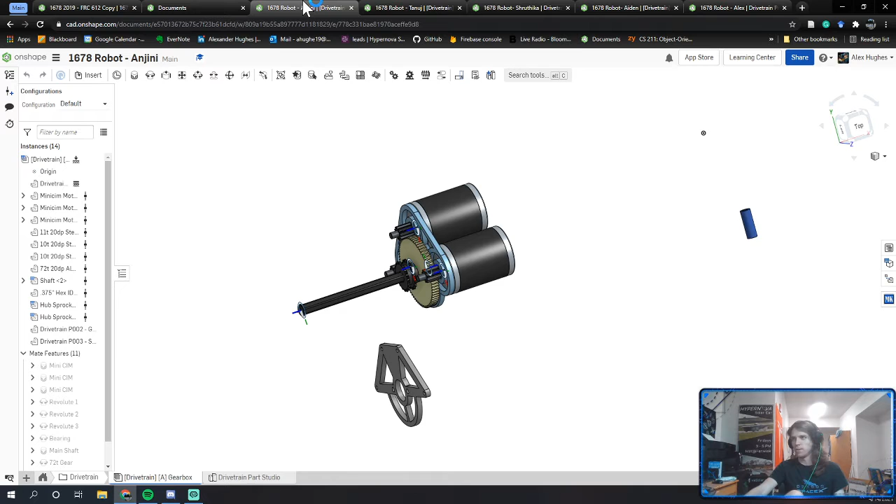Tanuj built his gearbox backwards. Anjini built their gearbox sideways for no particular reason other than to annoy me.

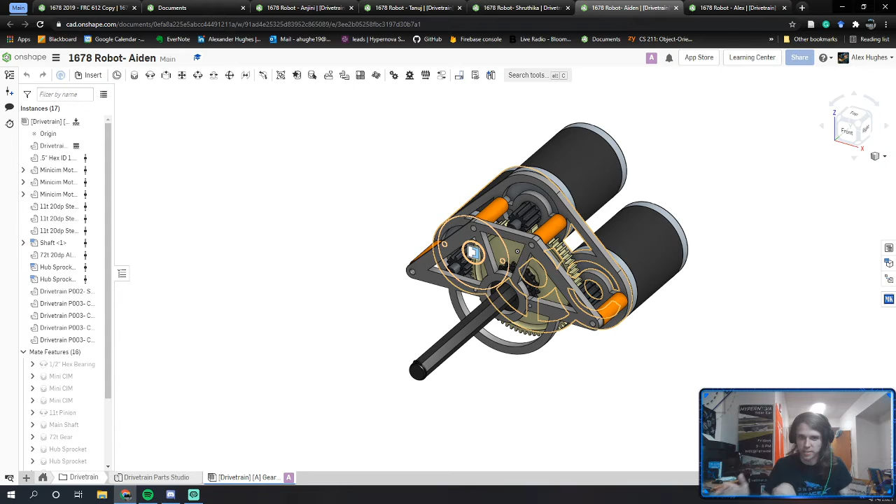Try and throw this water bottle into my recycle bin. Missed.

Greetings, Aiden and Tanuj. How are you both doing today? Good, how are you? Doing pretty good. Got my second COVID shot today, so I'm seeing if I get any side effects. Haven't felt any yet, but we'll see.

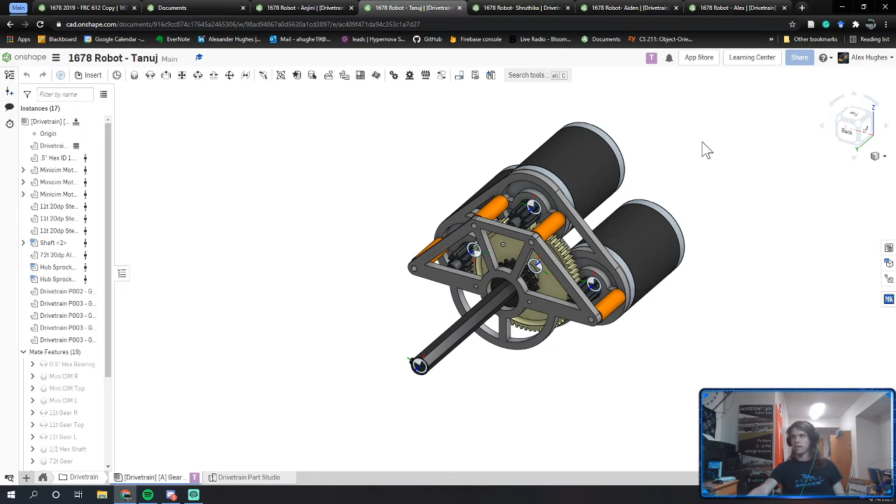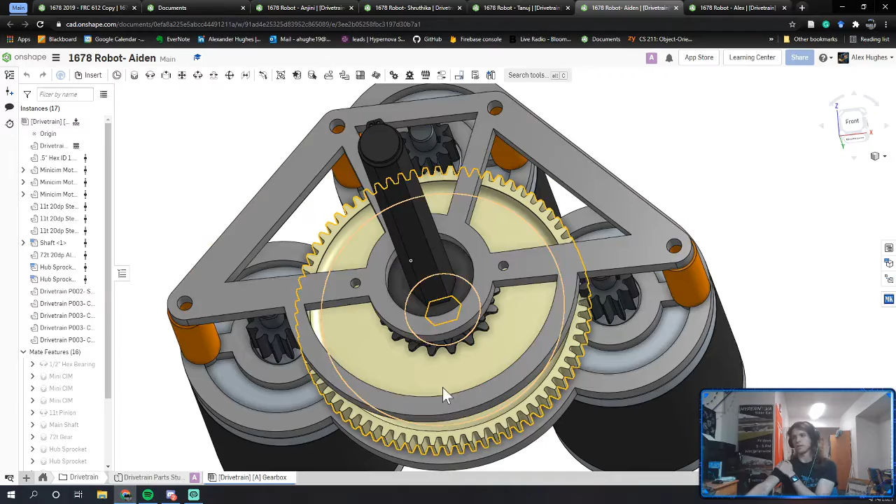I'm just kind of going between these three views. I can't notice anything major. The only change I would make, Aiden, is here: you don't have this lower bar connecting this lower guardrail, while this one I have right here I would probably model, just because realistically thinking about CNCing this bar, that's a lot of distance without any sort of support to the main structure. That's going to be less flexible, less likely to be clean when it comes out of the CNC. It's just overall not great to have that much area unsupported. So nothing major, just something I noticed.

Tanuj, if you ever get annoyed by these mate icons, press K on your keyboard and that turns them on and off. Or press J, same thing happens with both of them. So K and J turn those off. I just like keeping them off because they annoy me.

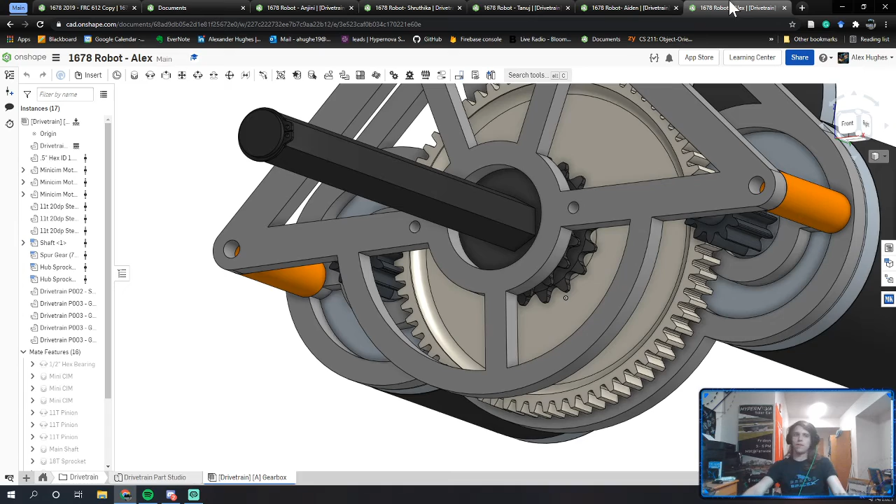Okay, well I guess we will go ahead and get started. First, do either of you have questions from where we left off two weeks ago?

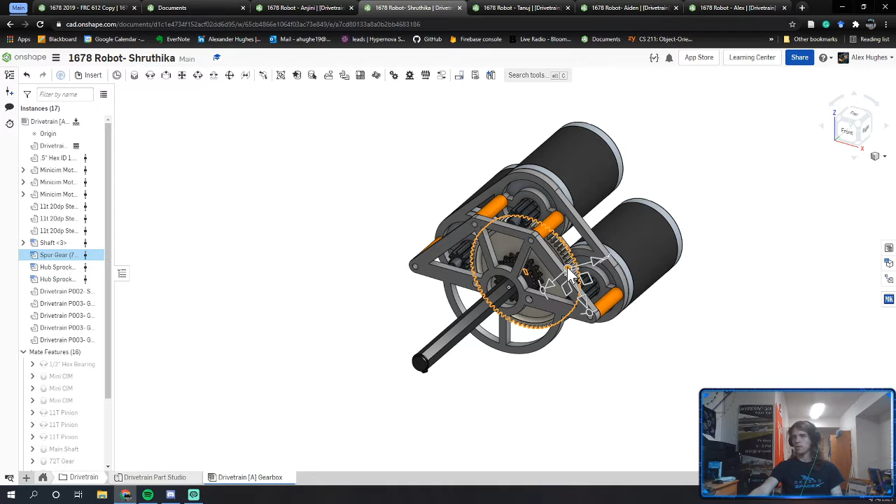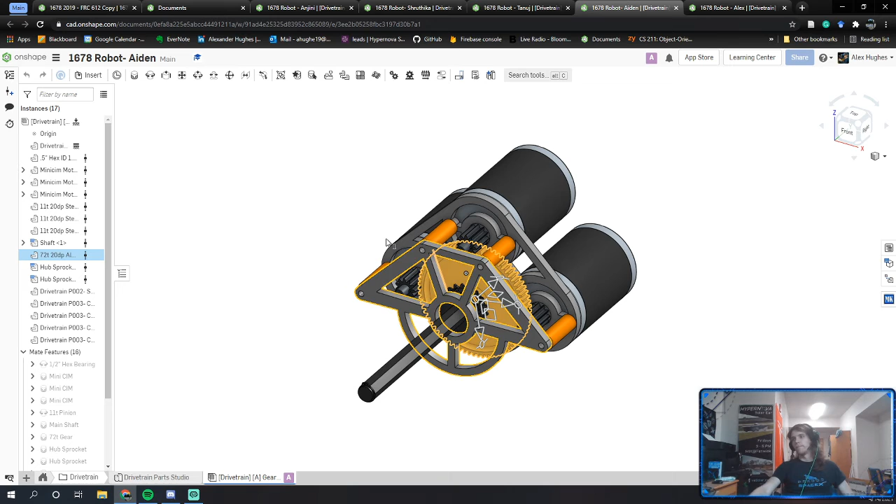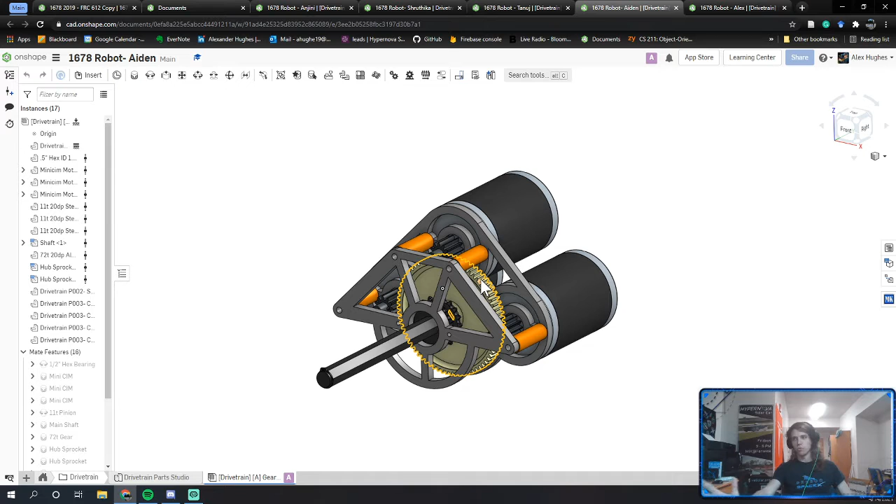Okay, so I assume none of you have questions, feel free to speak up if you do. One other thing I noticed quickly from both you, Tanuj and Aiden, you used the 72 tooth pocketed aluminum gear, while I used the 72 tooth steel gear. Doesn't matter, the CAD models are identical, but if we were actually CADing a robot we were building, we'd want to use the component we'd actually design into the robot. As I mentioned last week, I prefer using all steel gears because steel gears don't wear down as much as aluminum gears. So if you're going to use steel gears in your robot, you might as well put steel gears in your CAD model, because worst comes to worst, someone pulls the bill of materials and says we need to buy an aluminum gear, when really we needed a steel gear. So that might be one minor thing to change. Otherwise, everything looks great, all of y'all's gearboxes look basically identical other than minor things.

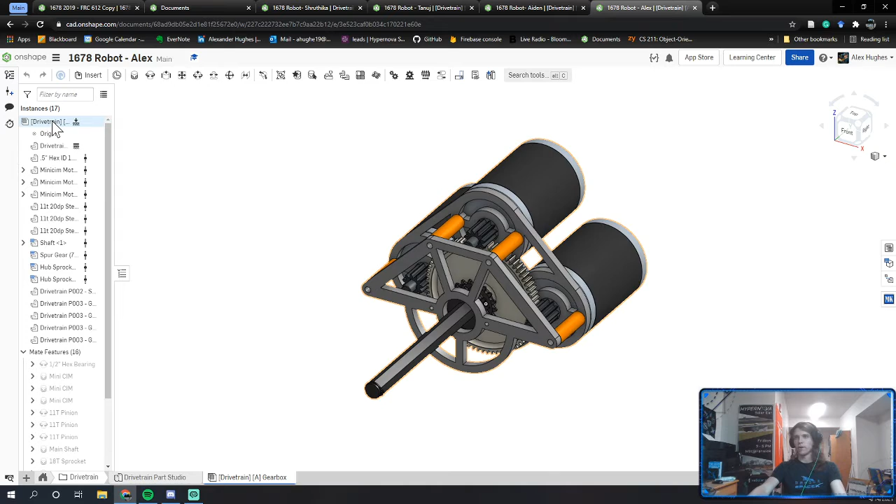I recommend quickly doing an interference check just to see if there's any major issues with your gearboxes.

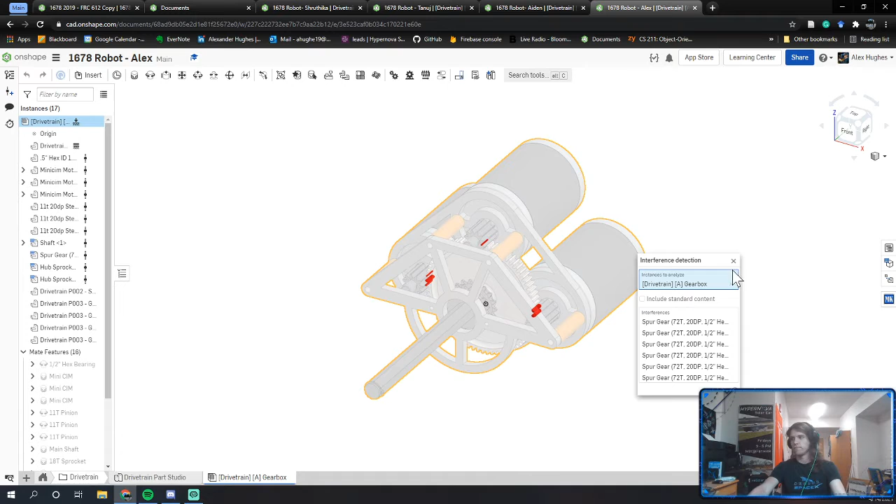Oh Shruthika, hi, sorry, where are we? We're just getting started, so we're in the Onshape documents. I was just looking at all of y'all's documents. Just open up your own document and follow along here. So again, let's quickly run an interference check. The way you do that is go to your assembly, click on the upper most instance on the left side instance panel to highlight everything, right click on it and hit check interference.

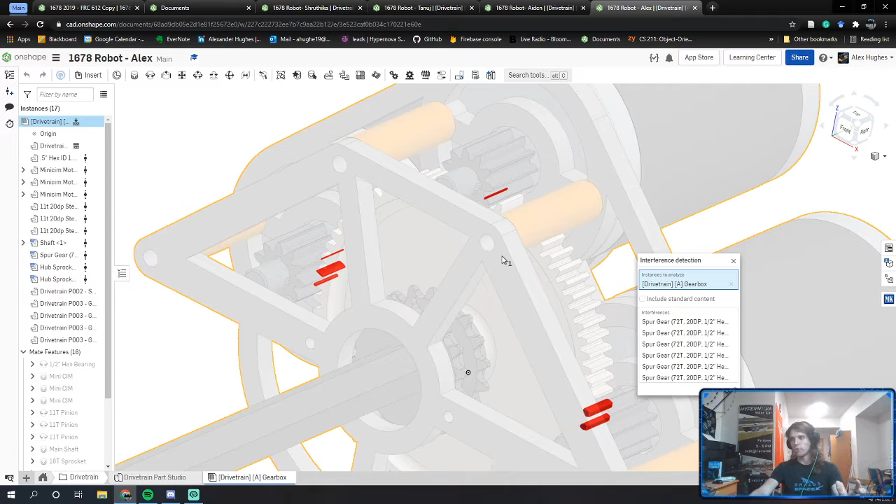Just look around to see if there's any major interferences. Interferences are shown in red here. You're always going to have some interferences. That's kind of unavoidable, but you have to think, is this an interference that matters?

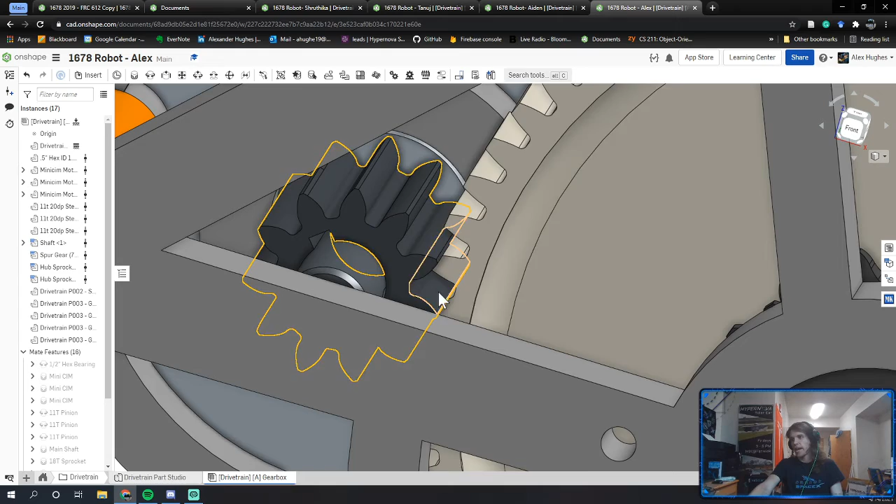In this case, I'm getting some interference between my big spur gear and my little pinion gears. But I know that doesn't matter because I didn't really model in the teeth, as you can see I could twist these gears. I know they mesh perfectly, but I didn't bother actually CADing that since it's a pain if you want the teeth to mesh. I should probably double check the center distance of those, but that's just the thing where you'll always see interferences.

Tanuj, is there a steel 72 tooth pocketed gear in MKCAD? Because I can't find one.

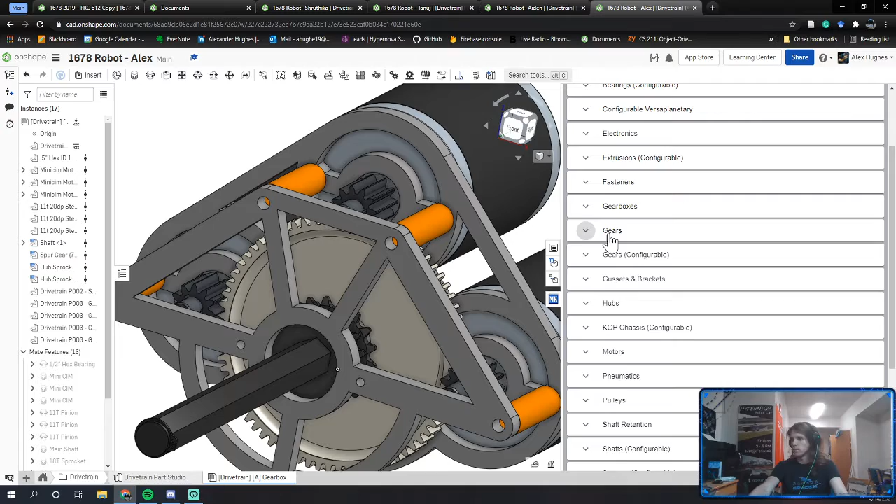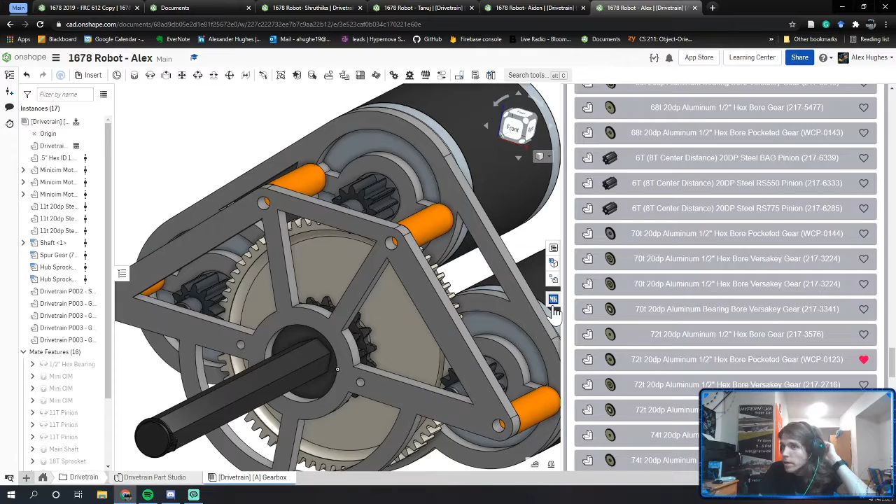There should be, let me check MKCAD quickly. Gears. Gears 70. Huh, that's weird, I do not actually see one in MKCAD either. Where did I pull this from? I might have accidentally pulled this from a different source.

Oh wait, let's check one thing quickly. They might not actually have steel gears that size. Let us check gears on West Coast Products. Pocketed gears, I guess. Aluminum, steel. Okay, I lied, there are no steel 72 tooth gears, so we have to use aluminum. My bad, ignore what I said earlier.

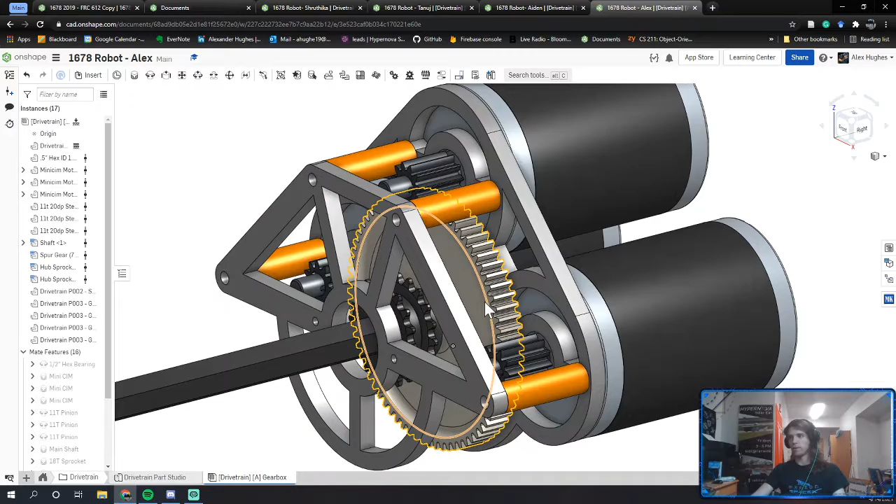I really wish they made larger steel gears, but I guess they don't. You don't get as high of teeth loading on larger gear sets, just because larger gears tend to have less torque on them. So I guess they don't feel the need to make steel gears of that size, but I would do it anyways because they're going to wear down.

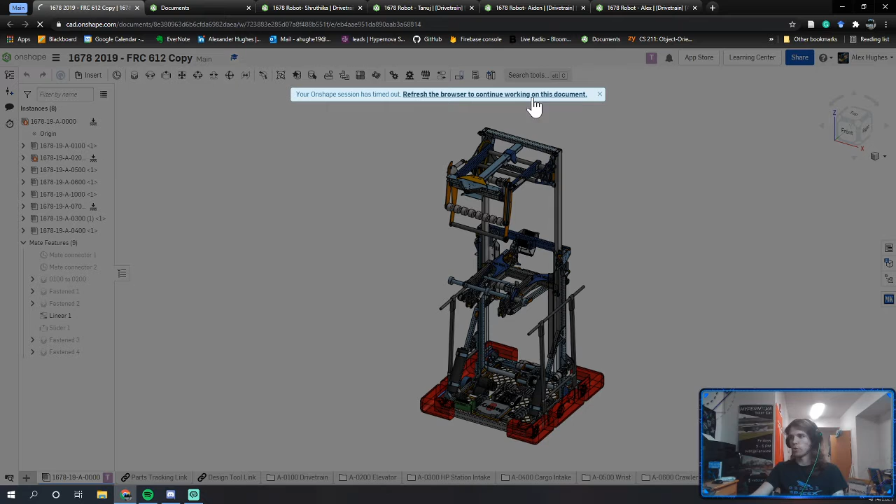Okay, so we got a lot done last time, but let's continue. I really want to get to the point today where we are starting to actually assemble the frame of the drivetrain. If we could get the drivetrain frame done today, I would be very happy. So let's start moving through that.

I am going to put a little block up here in my tabs so I know which tabs I'm working on. Okay, so let us go into the 1678 robot and let's see what we need to do next.

If it's ever going to load. Hopefully my internet didn't crash. I don't think it did, no. My internet might crash today. I've been trying to stream the past few days, just general solar car 3D printer stuff, but my internet keeps crashing, so it makes it very frustrating.

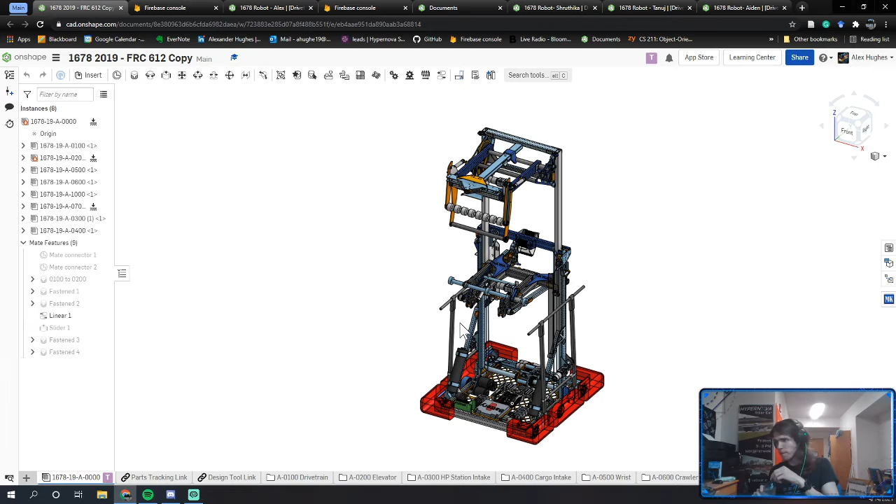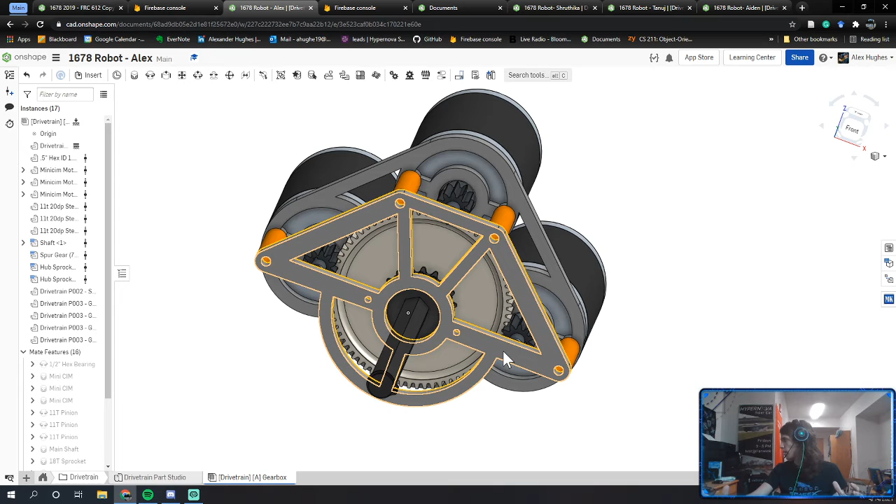So I'm going to go down here, zoom into the drivetrain. Actually let's go to their drivetrain assembly. Okay, cool. So there's a few changes that we need to make to the gearboxes before we continue. First and foremost, the gearboxes we designed aren't actually completely realistic because, I've mentioned this a few weeks back, but we need to add fillets to all the corners.

Shruthika says, I have an interference with my spur gear and I don't know how to fix it. Let me just check here quickly. I'm going to do an interference check. Ah, I see, so this is actually a good example. You have this big interference here in the middle, and this is the type of interference you want to worry about.

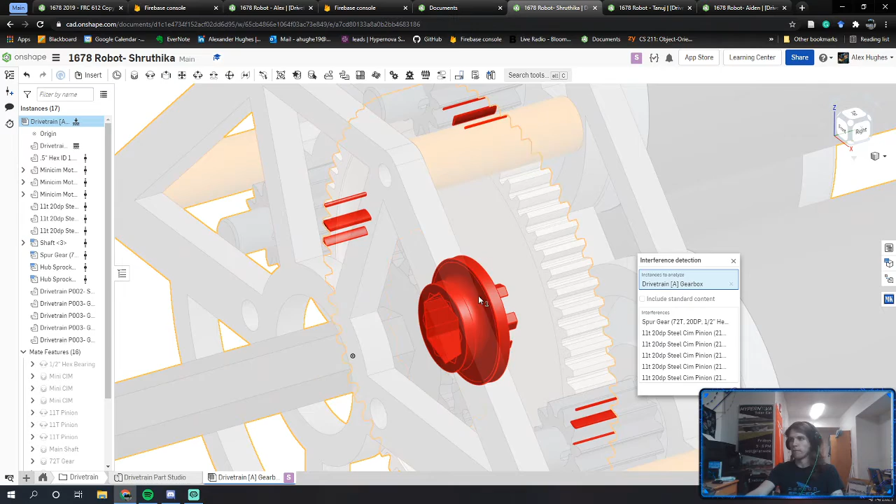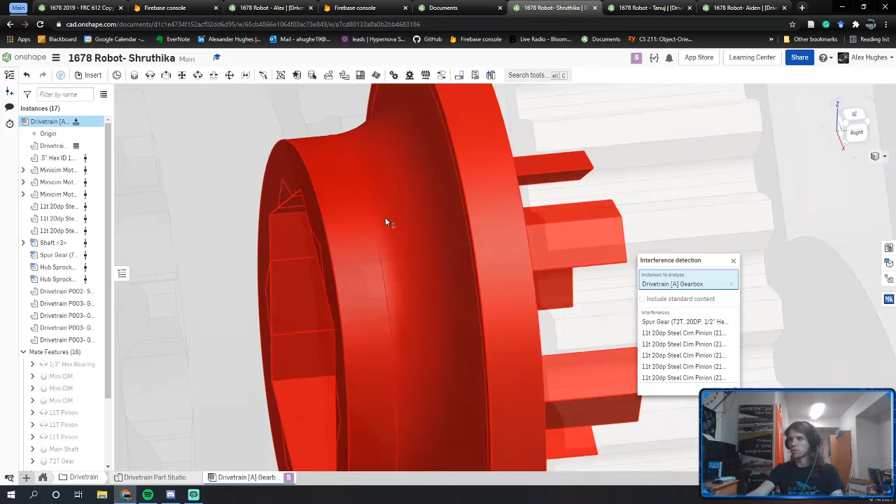So it looks like to me you're having some issues with your hex shaft being tilted at a 90 degree angle, or not even a 90 degree angle, at like a, what is it, 30 degree angle. So that's causing these little pyramids. But then it also looks like you're having an issue with maybe your bearing. I can't quite see what that is, but that might be your bearing conflicting with the rest of your gearbox.

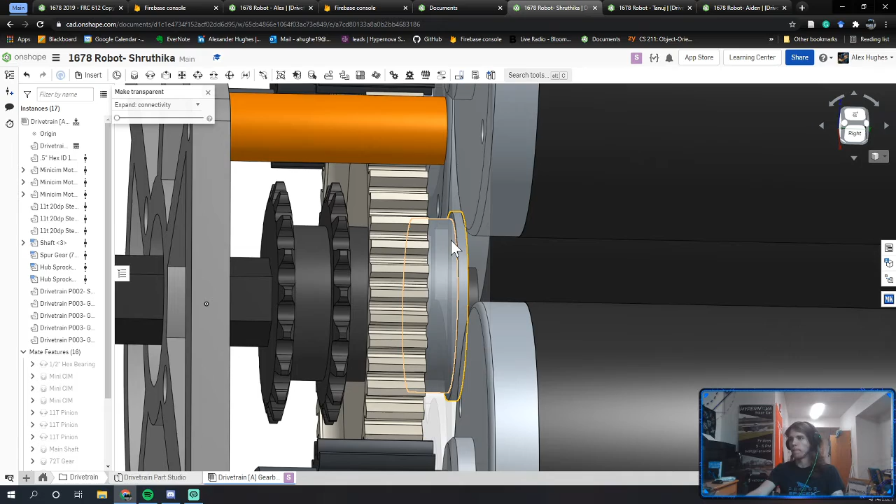Let's actually get in here and see. One easy way to check this is if you right click on a part and make it transparent, you could get in and see what the actual issue might be. So I see that the bearing is going in here, and I'm thinking that possibly the bearing diameter might be larger than the hole that you're putting it into.

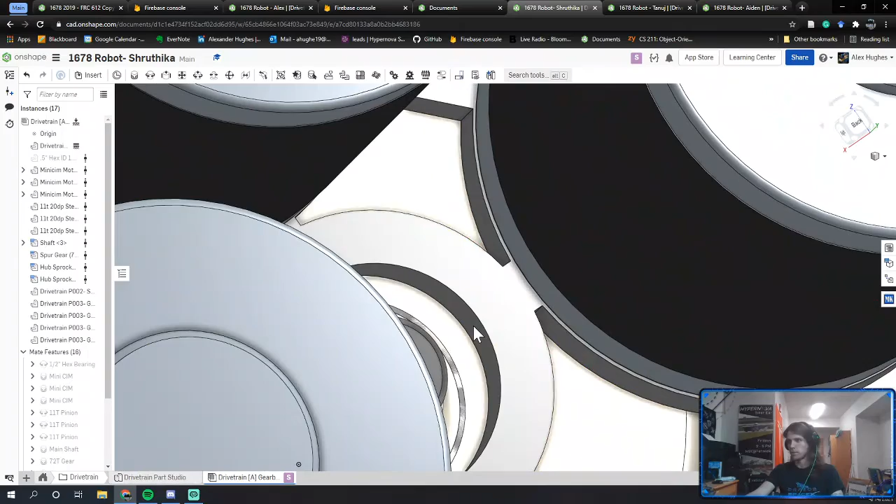I'm going to click on the outside of this bearing, and that has a diameter of 1.124 inches, just under an inch and an eighth. Now let us hide the bearing quickly, and let us grab the outer diameter of this hole. The hole itself also seems to be 1.124 inches, so that doesn't seem to be the issue.

Now that I'm hiding that piece, let's run another interference check. So it doesn't seem to be the bearing - the bearing's too far back. It's something here in the middle.

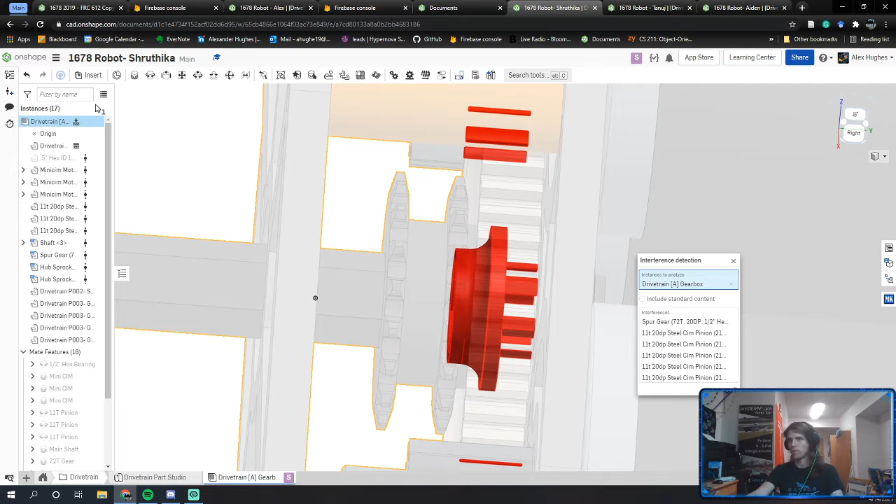So let's hide your sprockets quickly. Ah, I see what the issue is. Your sprocket gear, if I hover over it, you can see the outline of it. The outline of your sprocket is actually going into your gear itself. Notice here, you can see the end of the sprocket is actually going into the gear. So if I hide that...

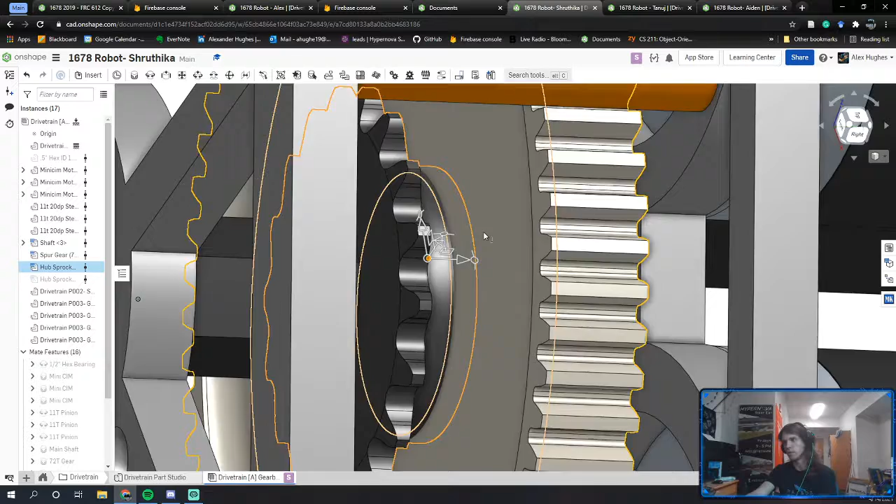That's what the issue was. You were covering up this part of your pocketed gear. So that is a mating issue.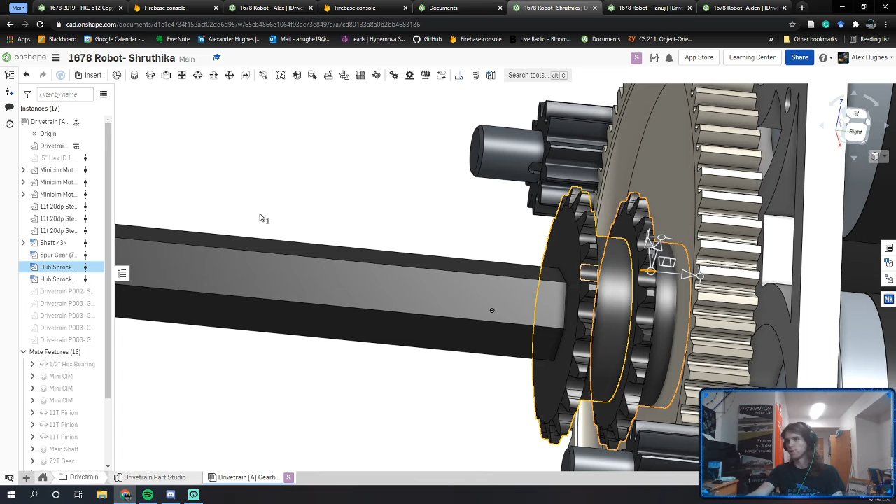So what you need to do is fix the mate for this sprocket gear. An easy way to do that is if you find the part that is your issue, right click on it and hit show mates. It will unhide the mate down here in your mate features, and you could find which of the two might be the issue. I'm assuming it's going to be this first one. You just have to make sure your mate connectors are correct.

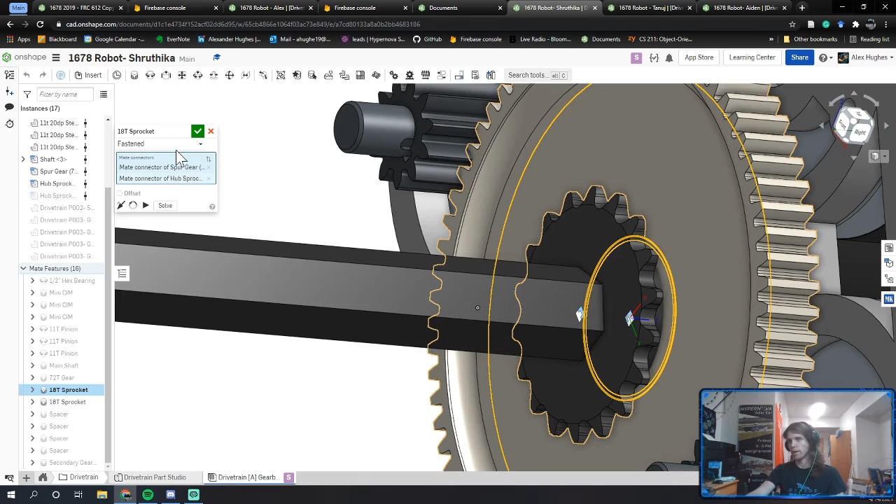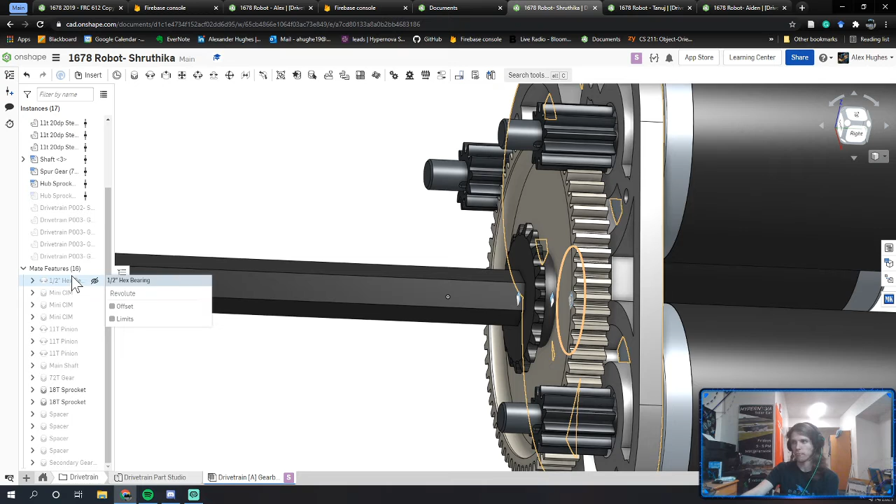That's a pretty easy fix, and that's part of the great thing about having your mate features named - you can easily go in here and find out what the issue is going to be. If you just had Fasten 1, Fasten 2, Fasten 3, Revolute 1, Revolute 2, Revolute 3, it sometimes gets very confusing. Most of the time I don't even need to show the mate features - you could just go down into the mate features and find out which one's the issue.

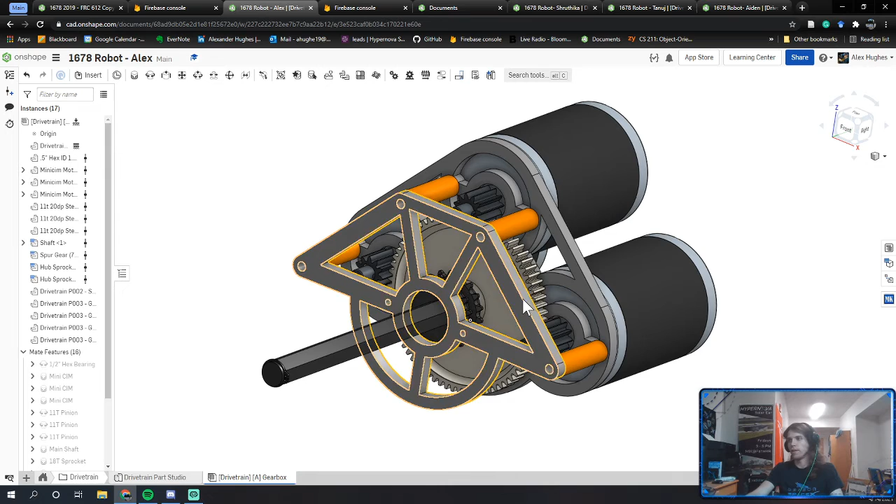Okay, so I'm going to let you fix that, and in the meantime we're going to continue working on some of these parts. I'm going to go back to the drivetrain part studio and pull up drivetrain part 001, the main gearbox plate, the one with all the Pokeball looking things.

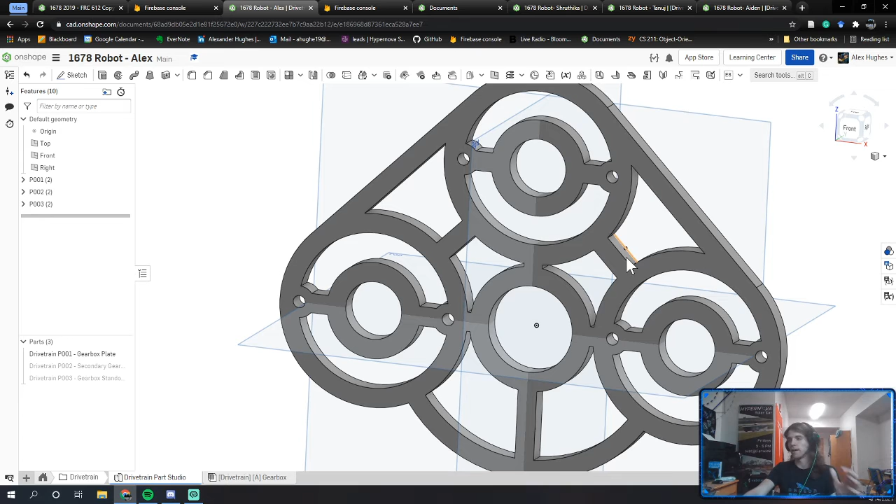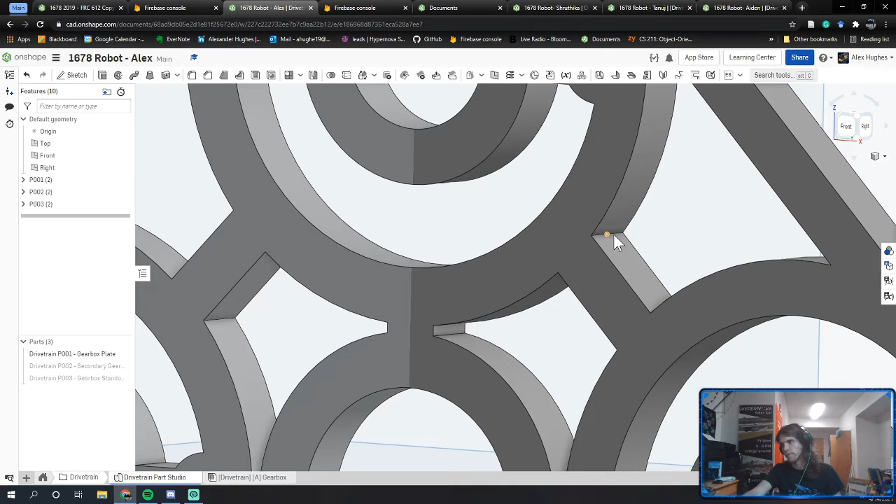As I said in previous weeks, if you're going to CNC this out, when you actually go through the process of CNCing stuff - God, that's hard to say - you can't create perfect corners. If you think about taking a round bit and shoveling out material using a circular bit, you're going to create a circular path. So anywhere you have a sharp corner, like here, that's just not realistic. You can't do that unless you had a really, really tiny bit. That's the only case in which you could make a sharper corner, but even then it's still going to be rounded slightly.

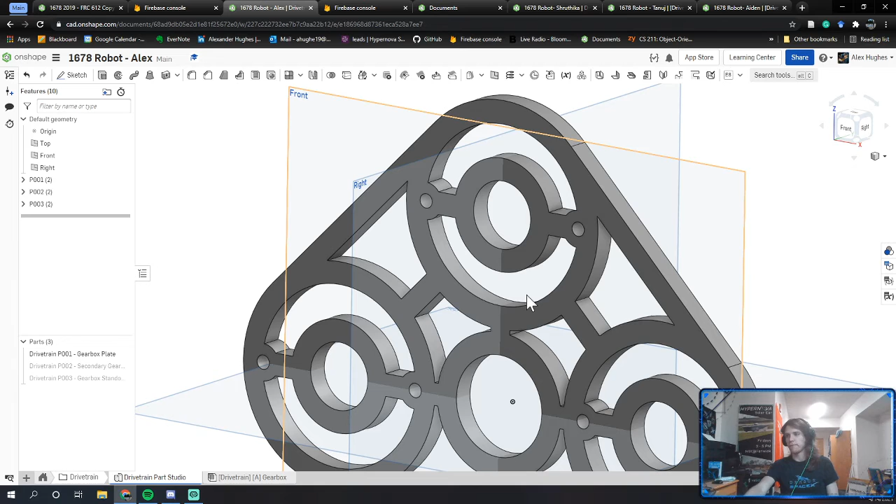So the way we fix this, and we have to fix it because if you were to take this and throw it into a CAM program like Mastercam or Fusion 360, it's going to spit out errors - it's going to say you do not have the tool available to make this toolpath. So we're going to fix this by adding fillets everywhere, and fillets, as you probably know, just round out a corner to a certain radius.

Now we could manually add fillets to every single corner, and I've done that before, and it's a huge pain. Thankfully, I found a really cool feature script called Fillet All Edges, from Julia's feature scripts. I linked this in the Discord yesterday, so if you haven't added this, make sure you go use it. It's the post before the one I put today in the general chat.

Just go to this Chief Delphi link, click on the link, and then there should be somewhere on here that allows you to add features. Kind of forget how you do it - let me look. I think it has instructions on here.

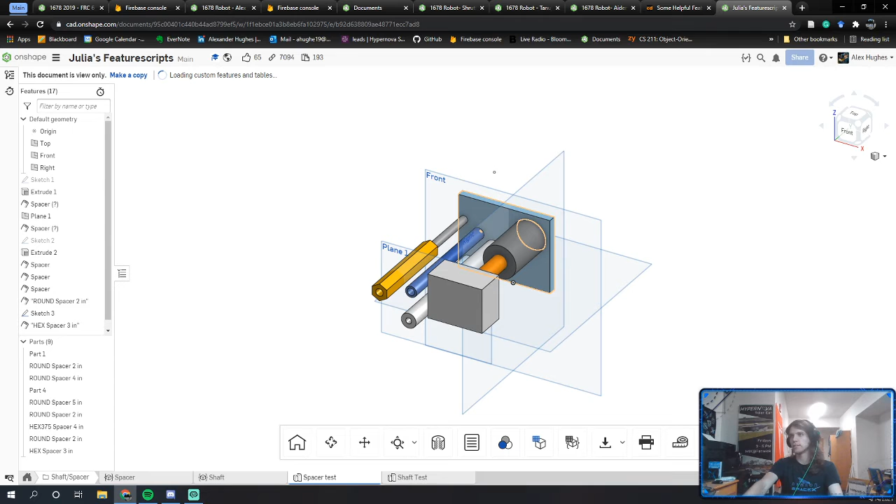Oh wait, I think I remember how you do it. You have to go up here in your own workspace, to the rightmost thing where it says add custom feature scripts, and then paste the link from Julia's feature scripts, the link they have in the Chief Delphi post. Just paste the URL there.

It will allow you to add the feature scripts from this document. So go through and add all of the feature scripts so you can have them all available on your toolbar. The one we're specifically going to use is the fillet all edges.

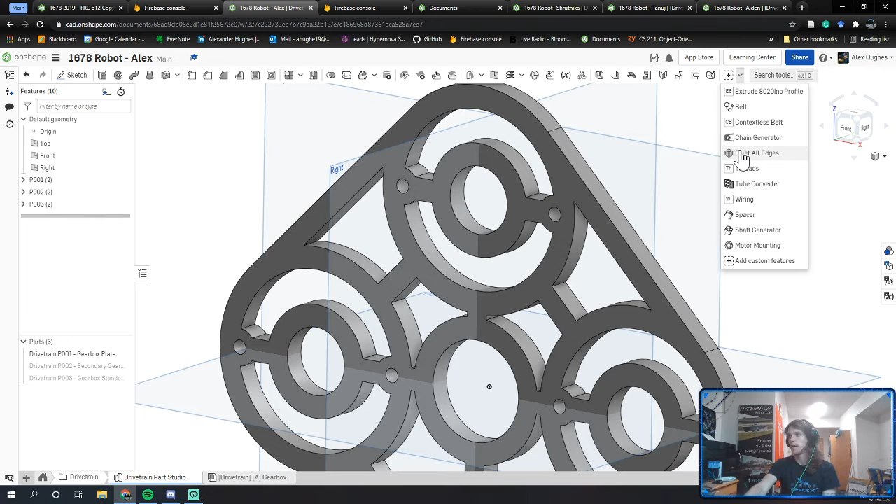I'll demonstrate this quickly, and I'll demonstrate it a few times. If I click fillet all edges, and then click on the front face of the document right here, it's going to go through and fillet every single edge.

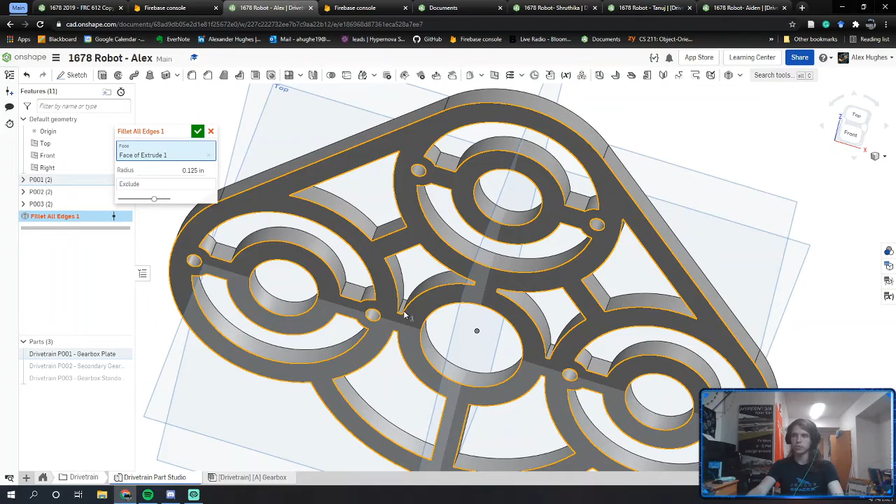Now, there's a key thing that I learned yesterday. In our situation, it actually throws an error because there are some situations where you can't apply a fillet. For example, down here, where you have two edges very close to each other, Onshape doesn't like that. It says if you have two fillets that overlap, it throws an error.

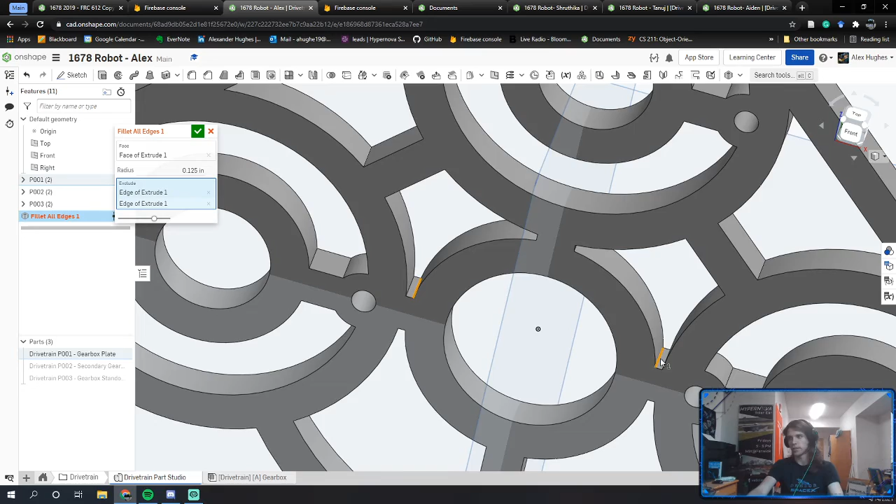So what you actually have to do is go to the exclude button, and exclude at least one of these very close edges. I'm going to go through here and exclude some of these edges that appear really close together. In our case, there are 6 of them.

You'll notice as soon as I exclude those 6 edges, it allows me to add fillets everywhere else. And I'm going to add a fillet radius of 0.125, or 1/8 of an inch, assuming we're using like a 1/4 inch bit.

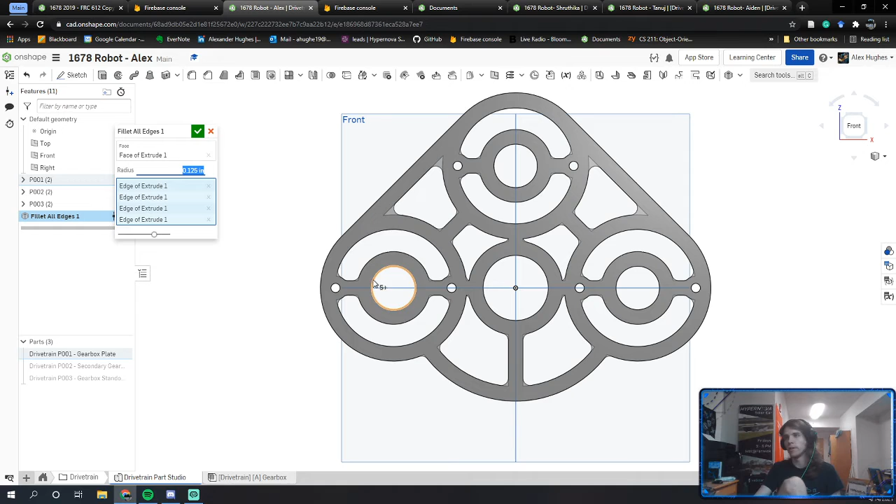It really doesn't matter what size bit we're going to use. It's kind of up to the discretion of Mr. Schneider or anyone operating the CNC mill. But I'm going to assume we're using a 1/4 inch bit here. I'm going to hit OK.

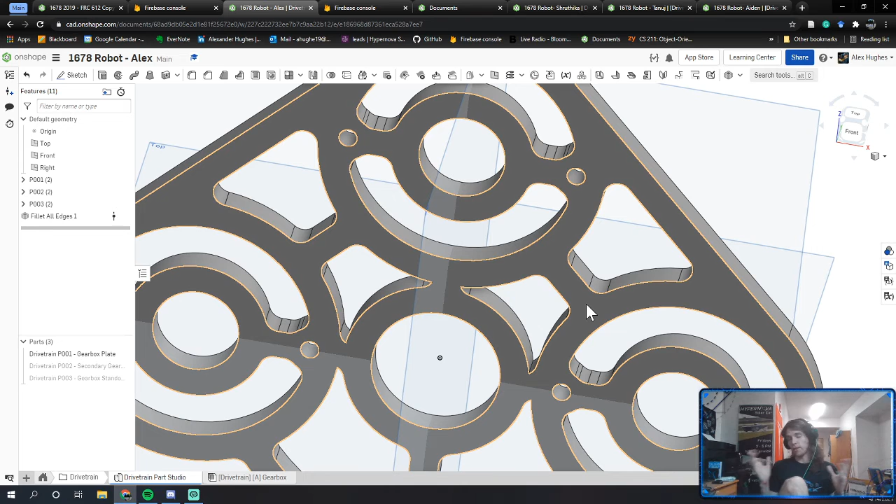As you can see, every single edge along here has been filleted, so now it's a lot smoother. Now I'll cover this again, so if any of you are confused about exactly what you do, I'll demonstrate how to do it again. But notice that those edges we excluded are still there, and still really sharp.

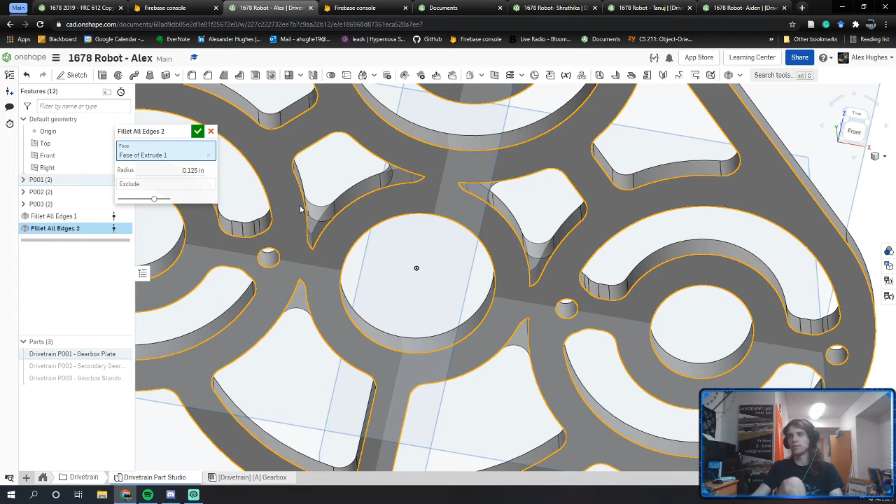In this case, what we actually want to do is apply a second instance of the fillet all edges. We go through here and fillet all edges again. Now there are no other edges except for the 6 I've already removed, so this is going to apply an additional fillet to those certain areas. If I hit OK again, you'll notice it fills in those areas really nicely. So now this is a part that you could actually CNC.

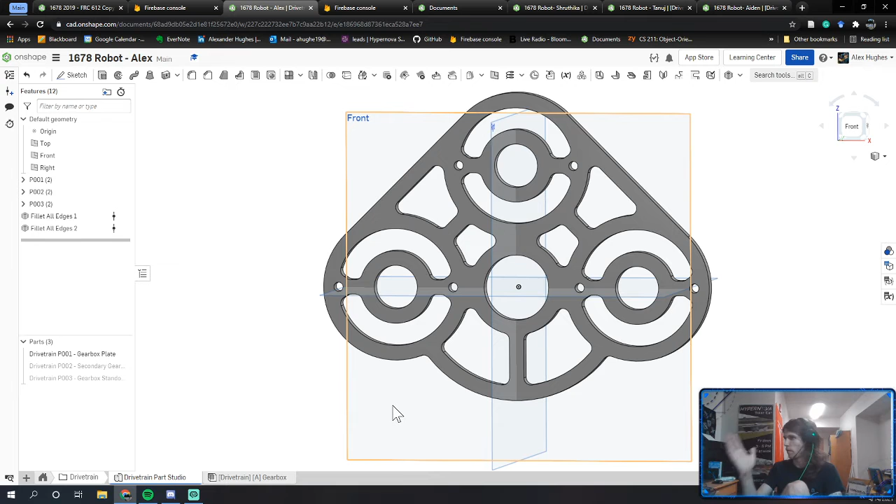I could take this, download it, upload it to Mastercam, and then run the CNC mill and actually get this part really quick. I could do it without having to manually apply like 100 or so fillets, which is a huge pain that I've had to experience before.

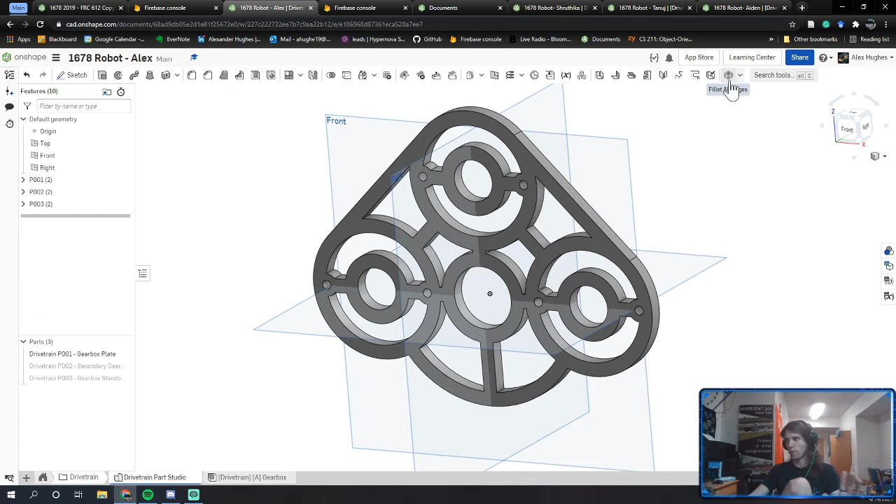So I'm going to demonstrate how to do that all very quickly again. If you missed it before, I'll show you one last time. Go to the fillet all edges tool that you imported as a custom feature from Julia's feature scripts, which are linked in Discord. Click on the face.

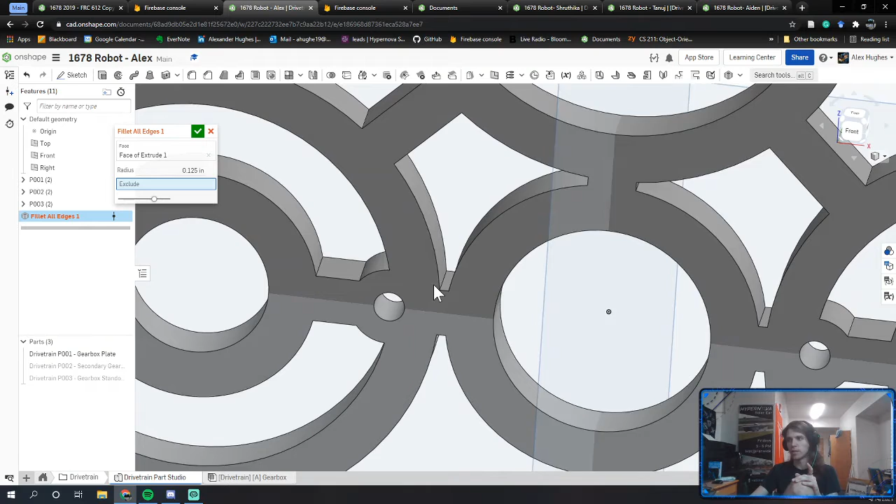I'm going to go to exclude, and exclude one, not both, of the edges where you see two edges appear really close to each other. In our case, basically around this center circle on our gearbox, you're going to exclude one of those edges that are really close together. It doesn't matter which one. As soon as I do that, it's going to allow me to apply fillets everywhere else.

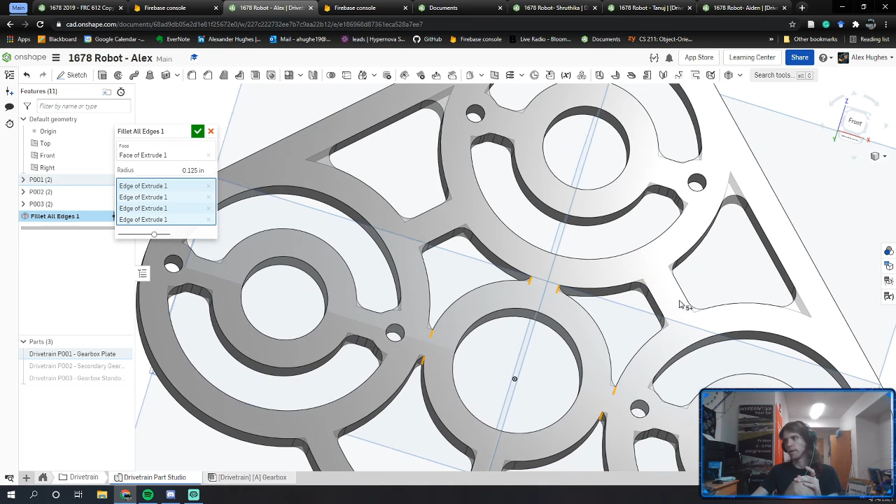Again, I have an 1/8 of an inch radius. I'm going to go up here and fillet all edges again. So now I've filleted all edges twice.

I'm going to select both of those, and throw them up into the folder with the rest of the gearbox plate things, so I could keep everything in my part studio nice and organized.

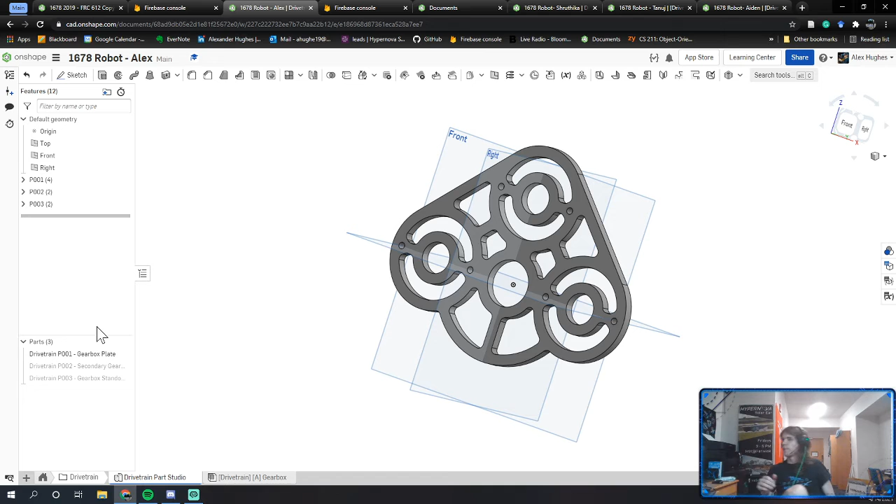There's another interesting— oh wait, can't you just highlight everything? Yeah, I think that'll make the top and bottom not flat. You might be right. I'm not sure what you mean by highlight everything. You mean like both of those close together edges?

I mean, you can experiment with this yourself. If I suppress both of these and try applying a fillet up here, then try applying a fillet down here, Onshape says failed to fillet sections.

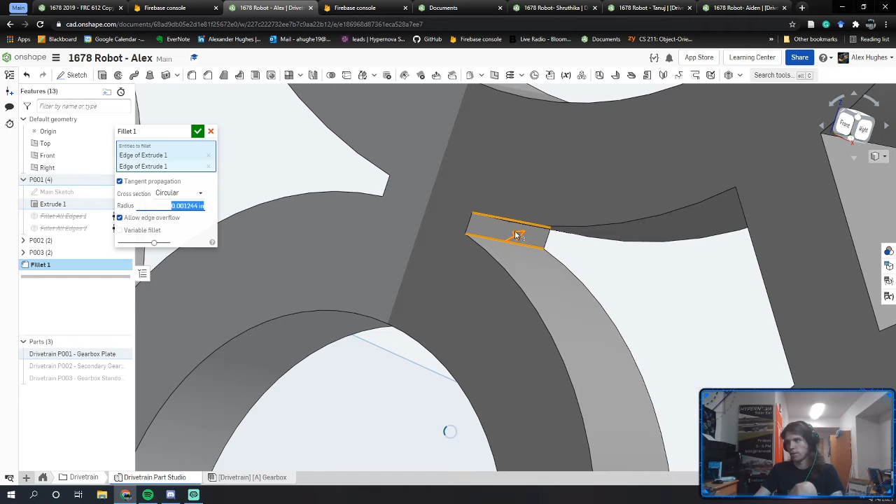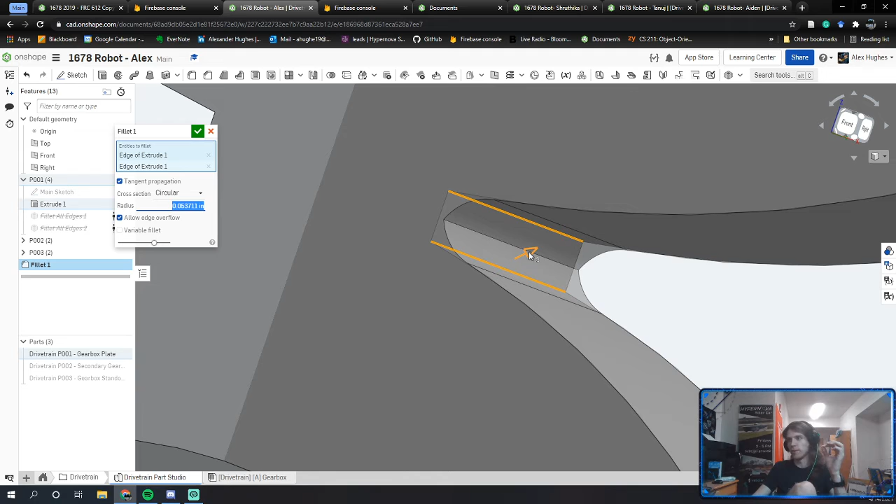So I just want to apply two instances of the fillet. Do it once and then do it again. Unsuppress those. Okay, so I filleted everything.

Now, one cool thing that you could do here, and this comes into team organization and management when you're actually building robots and you want to organize everything together. Hold on. Okay, yeah, sorry, it's just reading chat.

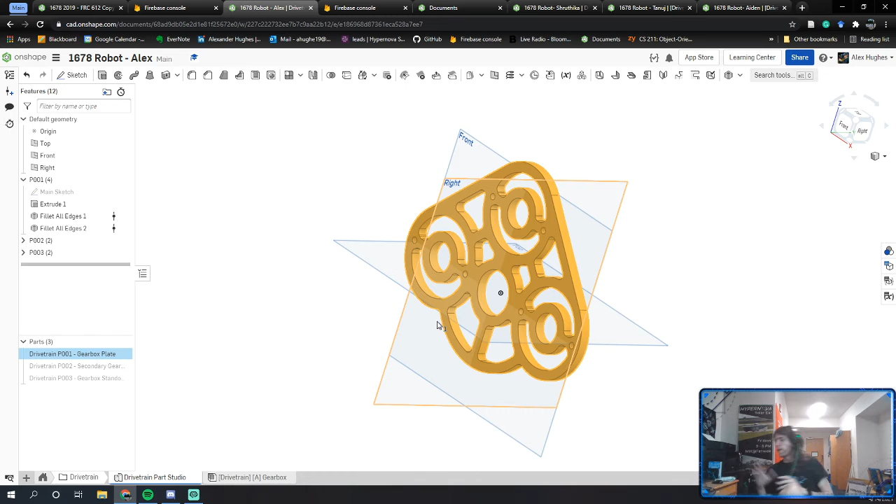One of the things that you want to do, if we're thinking about building robots really efficiently during the season, is you want someone on the mechanical team to go to your robot or your assembly. Say they come to your gearbox assembly and they want to pull up the bill of materials. You want someone on the mechanical subteam or fabrication subteam to be able to build your CAD model without ever talking to a CAD member.

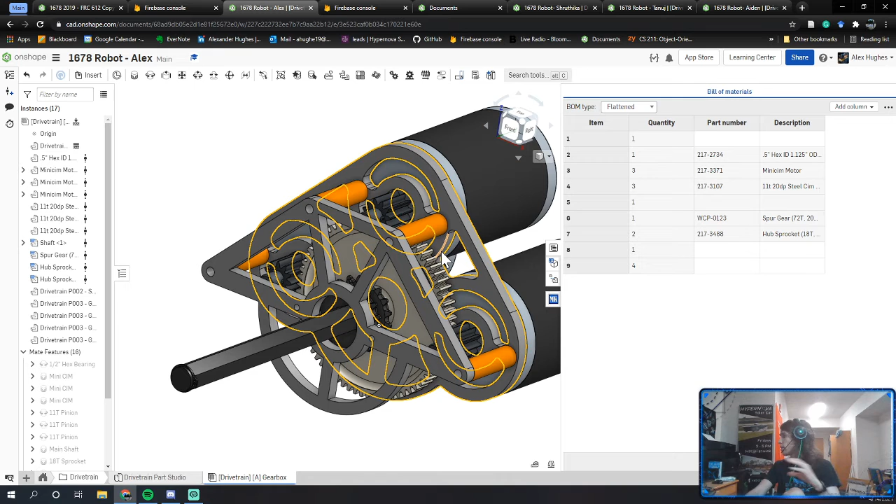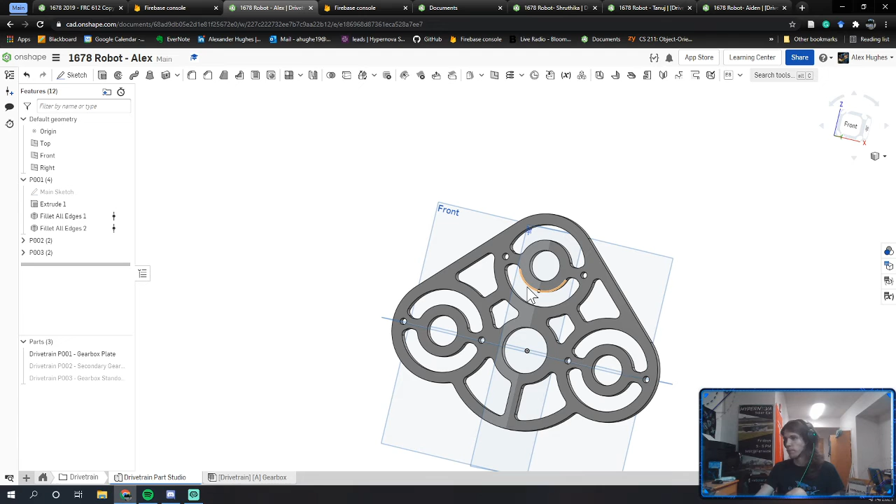All of the information should be stored in Onshape. So in a situation like this, where we as CAD members decide this part must be made with a 1/4 inch CNC bit or smaller, we want to document that. Because let's say someone pulled this CAD model and went to the CNC mill and used a 3/8 inch bit or a 1/2 inch bit to mill out this part, it would throw errors and they'd have to come over and say, yo, Aiden, why can't I CNC this part? And you're like, oh, because you need to use a 1/4 inch bit. How do they know that?

There's a cool thing I found out: if you right click on your parts down here in your parts list and go to properties - we've messed with edit appearance and assign material - but you can actually go to properties and add information here.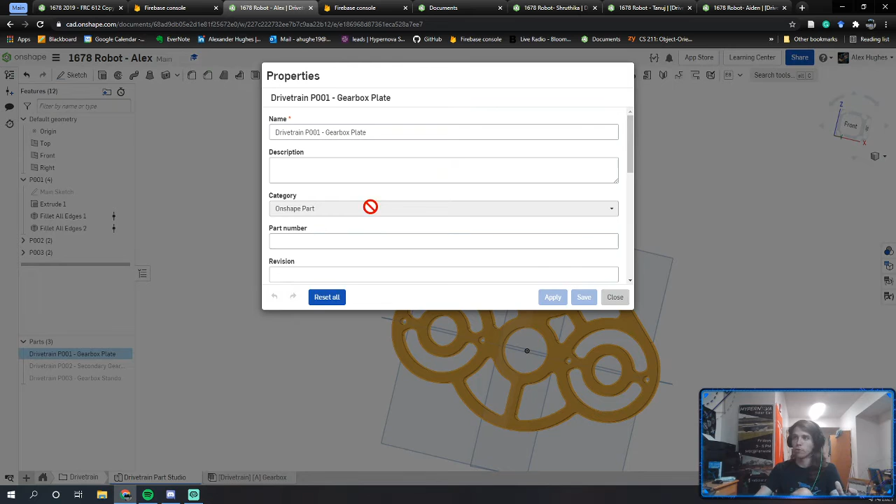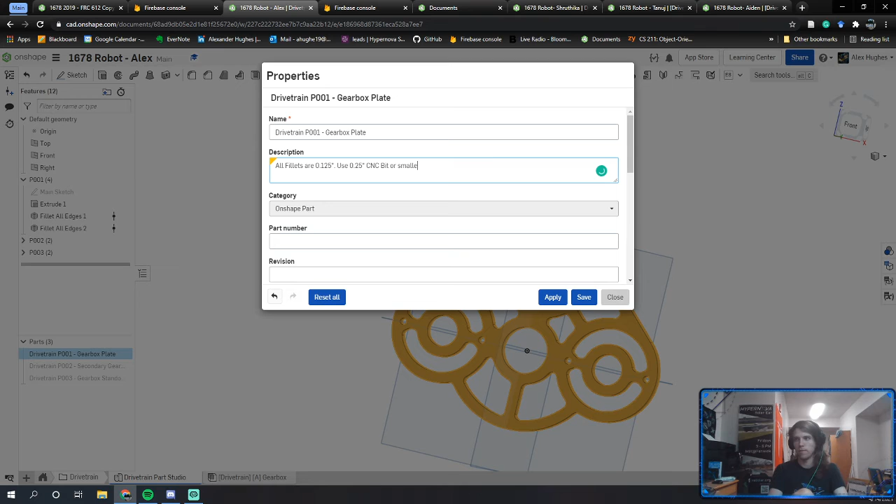So for example, here in the description, I could say all fillets are 0.125 inches, use 1/4 inch CNC bit or smaller. And I could hit apply and save.

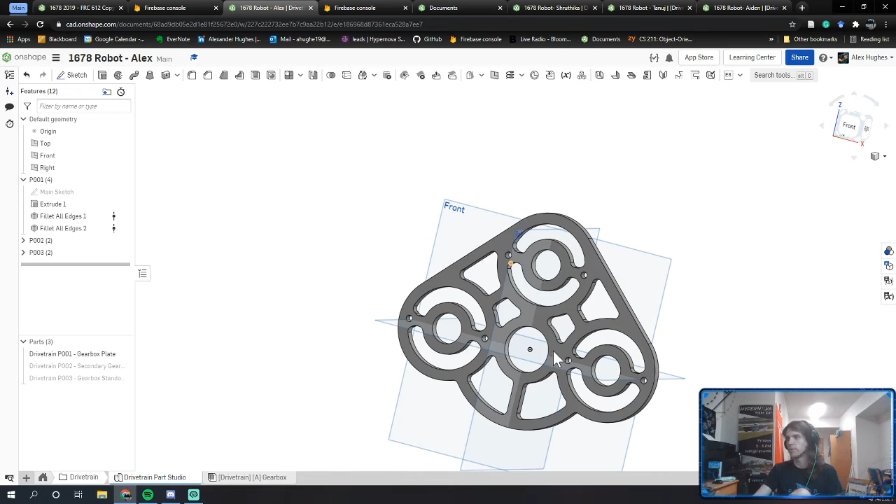So if someone were going in here and let's say we use a bill of materials manager, you notice now in the description it has that information attached to it. Or if you were to make a drawing of this part, you can attach that information to the drawing and hand it off to someone. So now that information you decided as a robot designer, as the CAD person, is permanently attached to that part. No one can complain they didn't know anything, because you've attached those decisions to the part.

That's something very useful that I'm sure will come up later, especially when we get to making robots during the season again.

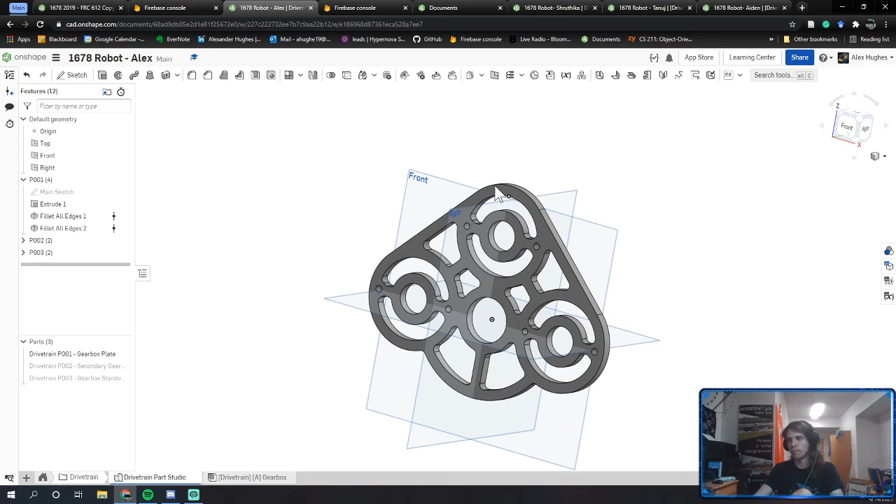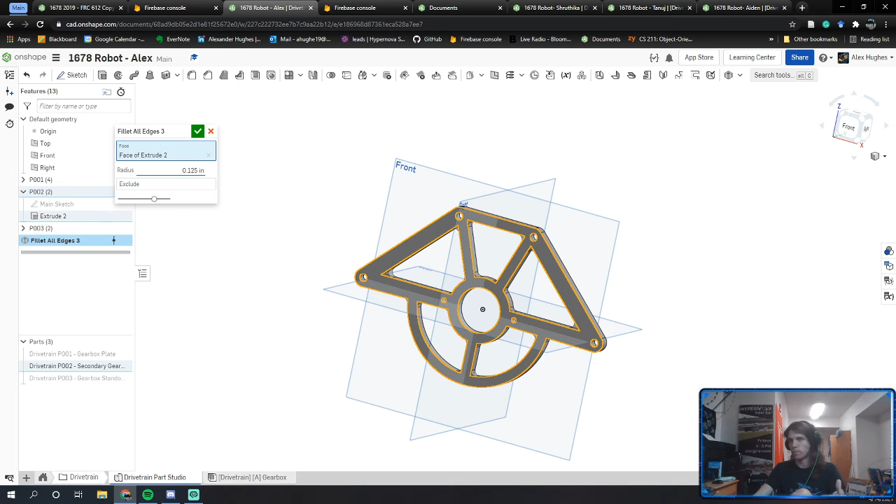So we're going to do that same thing we just did to this second gearbox plate. We're going to fillet all edges one more time. So we're going to pull up drivetrain part 002, and we are going to fillet all edges. Click here - as you see, we don't have any errors. So make sure again, 1/8 of an inch radius. Done, boom, that's all done and good.

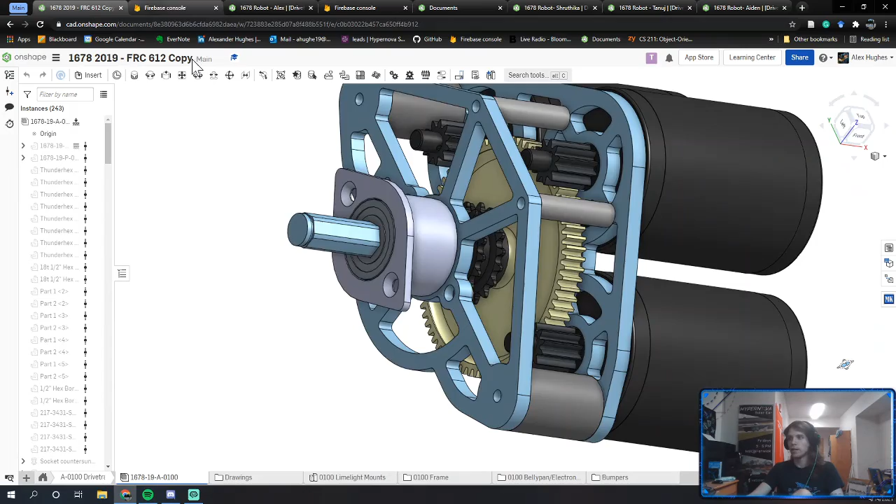So now if we go back to our gearbox, we notice that all of our parts have nice rounded edges. So this could be very easily CNC'd, so we're all good on that front. Let's look at what else needs to be done on this gearbox before we can move on to the actual drivetrain itself. The last major thing on the gearbox appears to be these things.